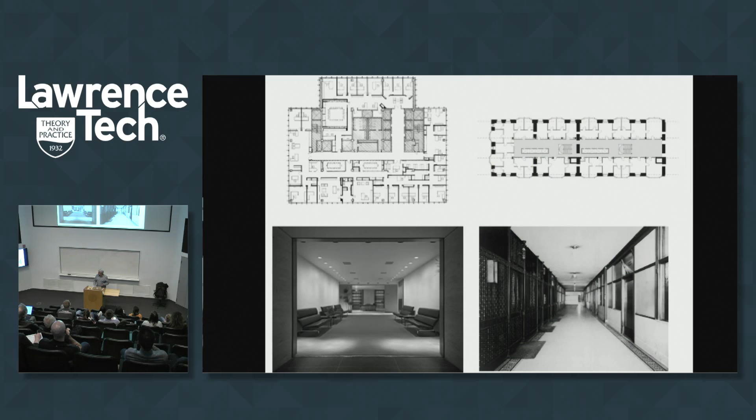Once air conditioning became so widely used, we suddenly just became ignorant as architects. We said, you know what, we've got air conditioning, just do whatever. And this building, the Seagram's Building—beautiful building—but its plan has nothing to do with performance. If you compare those two, just look at the lobby space between them. There's not a single window in the Seagram's Building. There's no natural light; everything is artificial.

So it's like, what do we really want to do? What kind of spaces do we really want?

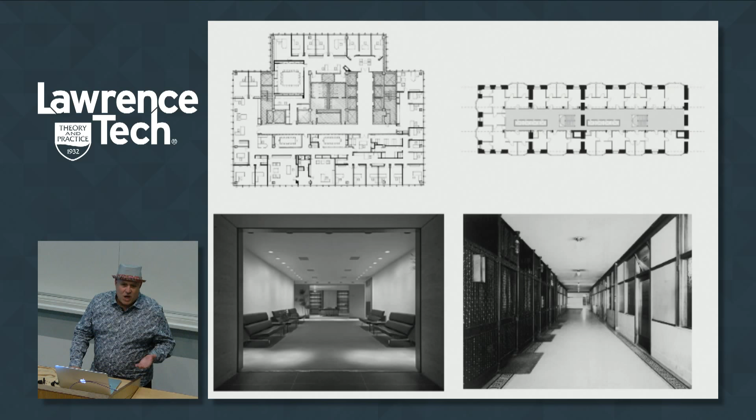So I look around at other things. There are a lot of great examples of buildings that we can learn from, and this is one thing I want to talk to you a little bit about tonight, is about looking.

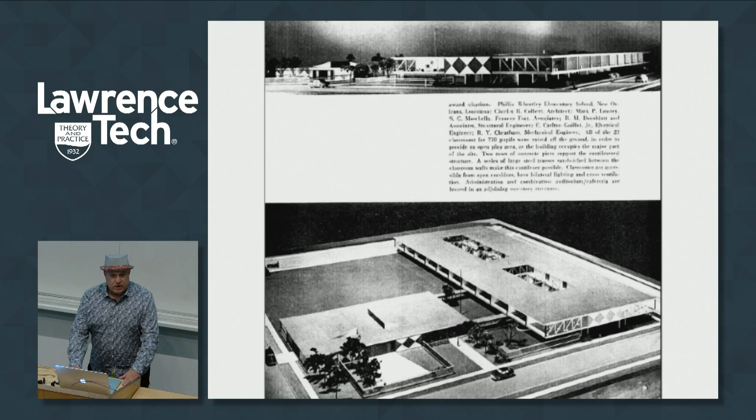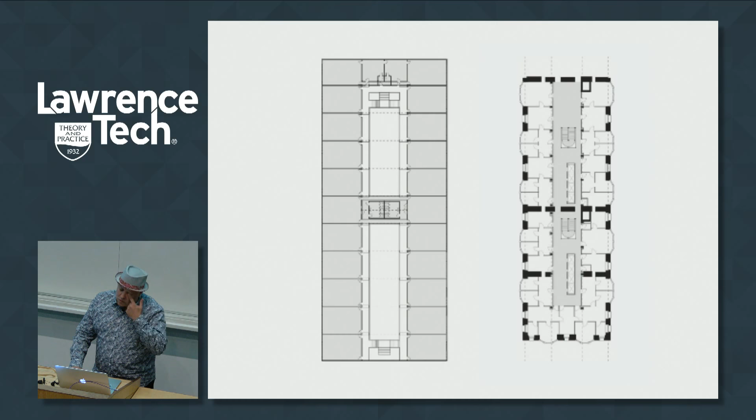This is the Phillis Wheatley Elementary School in New Orleans, done in 1953 by Charles Colbert. And it's a beautiful building, but if you look at the plan, it's almost exactly like the Monadnock. It was that way for a reason, because it was designed without air conditioning. It's this wonderful building with lots of natural light, cross ventilation, and really, really a beautiful building.

This building was around for the longest time until some smart person said, it's a little warm inside here on some days, we should just put air conditioning in and it'll be a lot better. Well, this is what it looks like now. So as soon as the building's not designed to be air conditioned, and as soon as we feel a little bit uncomfortable, we want to throw things away. This building will probably face the wrecking ball here very quickly.

Another building also in New Orleans, done by the same architect about the same time, another school, is a brilliant design, raised up, created a shade porch. If you look again at the plan, those two little lines in there are actually a stair, goes directly up. No circulation in the building at all. Glass cross ventilation both sides.

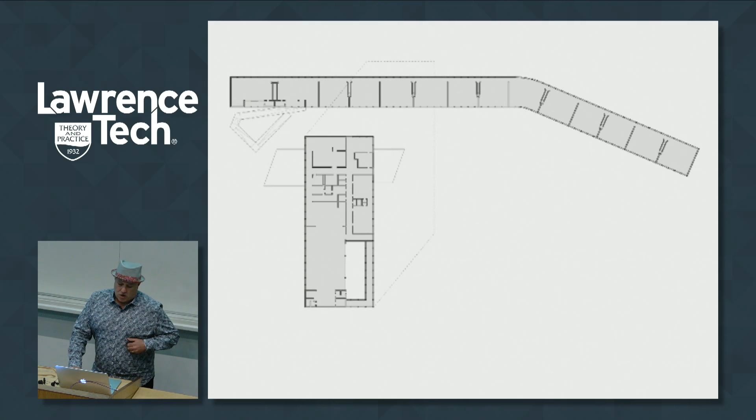It's just pretty magical. So the point is, what I tend to do is when we start a project, I look at other things. I'm showing you some of the research we did before we did a school in LA.

So we did this small charter school. It's a 500 student school in a very tough neighborhood in South LA. This school is built on a site that is 1/15 the size of a typical school of its size, so it's basically an infill lot.

But it has a lot of those things that I just talked to you about. If you see the plan, the long arm faces into the prevailing breezes, so it actually scoops the air between the building and induces airflow through that passageway in the middle. It's also south down below, so the building is shaped to shade the public space outside to the north.

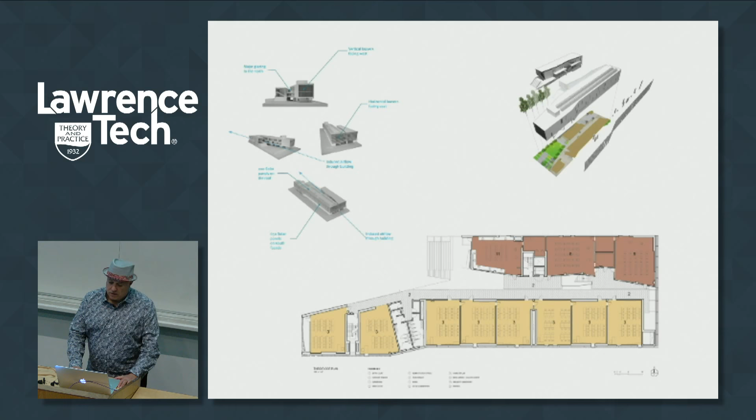So this is kind of a diagram of it. It has 600 solar panels built into the south facade, and you can see the courtyard to the north. My staff actually put the shadow on the wrong side. We can build them, but we don't know how to draw them.

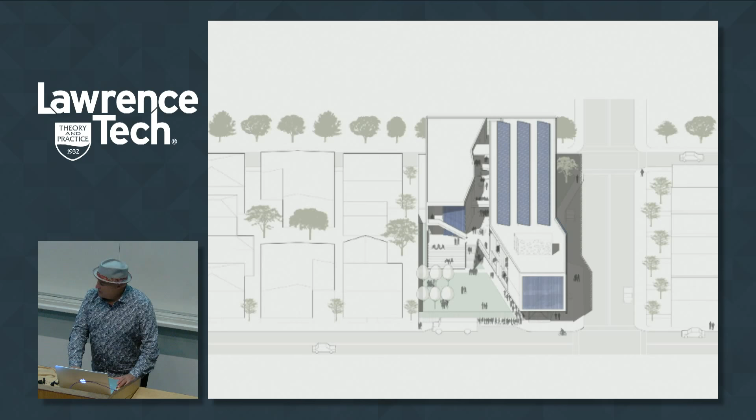And the building, as you look at it, you can see the north side shaded. The west looks like it's solid. This is what the west facade really looks like. It's a very sculptural piece of the building, but it's just 2-inch steel fins, and they're spaced in a way that they provide soft natural light into the building.

And so you get classrooms which have views, they have privacy, they have natural light. They rarely turn the lights on in these classrooms. And this building, because of its low usage of lighting and the solar panels, produces about 80% of its own power.

But I always look at these things too as an architectural opportunity. The idea that it can be both performative and aesthetic has made it almost impossible for our clients to value engineer our projects. So in this case, they said, wow, the solar panels cost a lot of money to put on there. So I said, all right, well, let's take them off and see what happens.

Well, we took them off and reran our energy calcs with no shade on the south facade, and the mechanical system cost went up almost to the cost of the solar panels. So they said, oh, okay, now I get it.

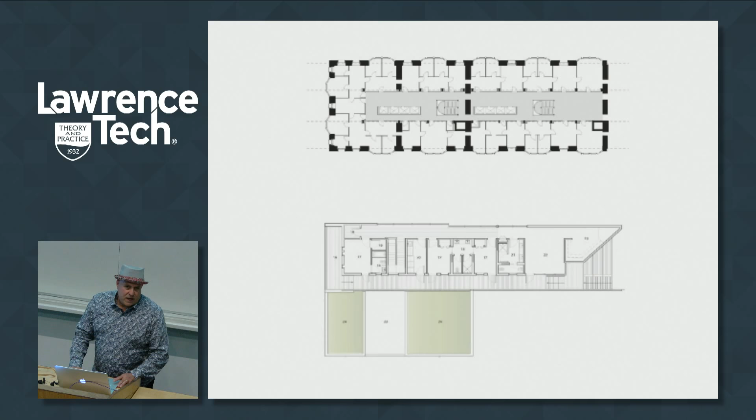On a different scale, this is a house in Venice, California, and it embodies a lot of those same things. The upper roof has solar panels, the lower roof has a green roof. All the rooms have single cross ventilation. You can see the plan here. Every room is just one room deep, and it has either a courtyard or air can pass through both sides. It's very close to the same principles you'd find in the Monadnock building or many other buildings from that period.

This is how you enter, through a courtyard. This is their office space, and again it cross-ventilates through that courtyard. If you're in the office, you can actually see through the living space, so they can be in the office and watch their kids in the backyard. They can even, when they open the doors, yell to them from across the house.

The whole building opens to the garden. You can see the green roof. The bedrooms are small, we basically made them really small so we could put most of the space in the public areas. All of them open out to this walkway. The parents' room is on the very end, so when the kids try to sneak out, they've got to get by the parents. But you can see the solar panels and green roof emerge.

And then these are the bedrooms, again all shaded, small, lots of light. I always say to people, who doesn't like natural light in here? Who hates fresh air? It's just common sense to do it. So we do that on everything, even when our clients don't care about it.

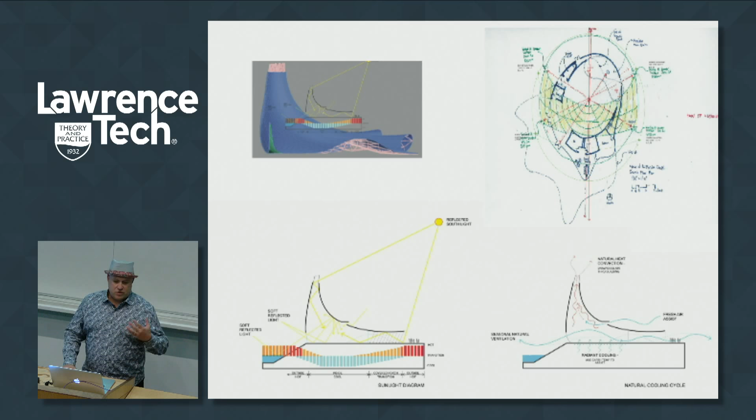As we do this, we tend to look together—it's not just about what you see, it's about being there. These diagrams, the one on the lower left, are about how you approach a building. In Florida it's hot and humid like here in summer, but also really bright. I grew up down there, and I know what it's like to enter a building—every building you walk into, you freeze, your eyes hit the glare. So what we try to do is provide a sequence for how you approach the building: big overhangs that shade you, cool you off before you go in, and let your eyes adjust. Then you go in, and you need less air because you've transitioned into a comfort zone.

The other idea we had was that in North America, the Polaris, or North Star, is always 35 degrees to the north—it doesn't change. So we made this big aperture so that when you're in the chapel, you could frame the North Star.

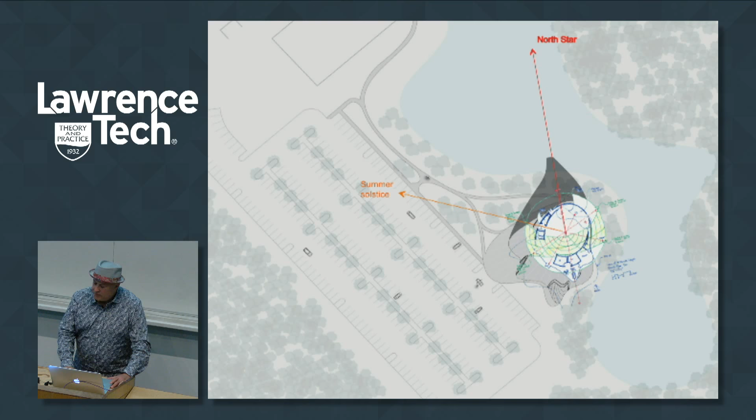It's hard to do a church for everybody—that's for nobody—so we looked for these kinds of spiritual things. We also considered how we placed the building on the site, so that not just the view to the North Star, but also the summer solstice, would align through the building. So one time a year, you could stand outside and see the sun setting right through the building. I couldn't get my mind off this image of the little chapel on the hill.

Also these things which talk about formal dress, whether it's a priest or a wedding—we tried to make a building that was more like a gown, one that could be for anyone.

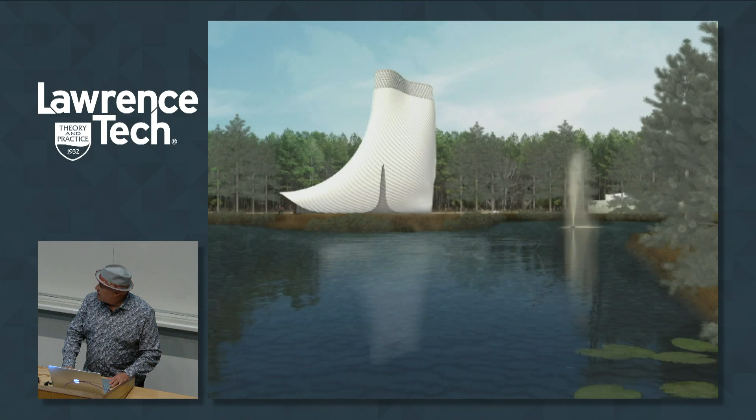So that's our site, and that's our building, and this is how you approach it. The building kind of lifts up, and that's the shaded entry, as you'd see it from the lake. And then the interior with the skylight above.

We also just finished this building in Cedar City, Utah—a $50 million arts complex. They've got these beautiful red mountains there, and if you visit, the sandstone weathering is just spectacular. So I started to think about that sandstone formation.

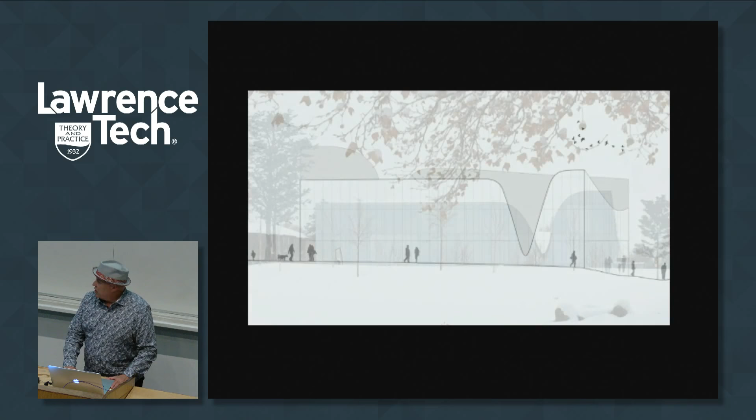That's our site. We started to look at these things and how we might transform a building to be a lot like the slot canyons that exist in the neighborhood—ways to have our building be part of the environment that's there.

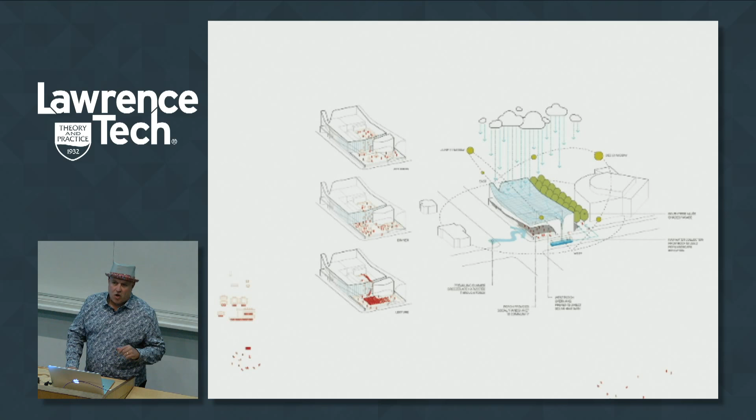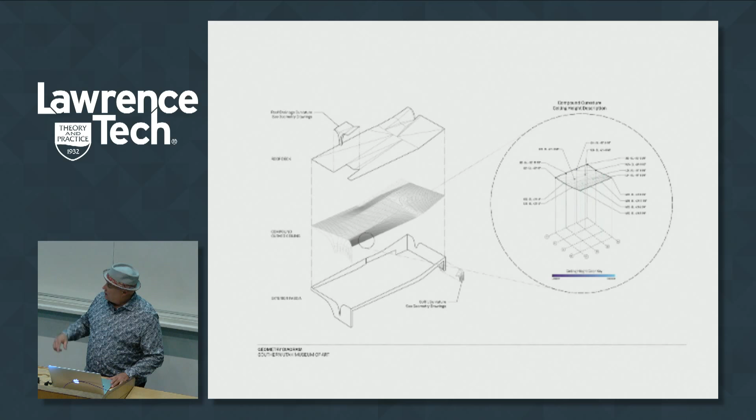This part is the museum—30,000 square feet with a big canyon-like roof that has no roof drains. All the water drains to the two ends of the building and is collected in cisterns. My client was very suspicious about putting no roof drains in the building, but we worked through the geometry to get all the slopes to flow. Part of it is really figuring out how to build it as well.

So here it is on the site, and I'll show you a clip of a bit of the construction so you get the idea. It's got the big porch you're seeing in the front.

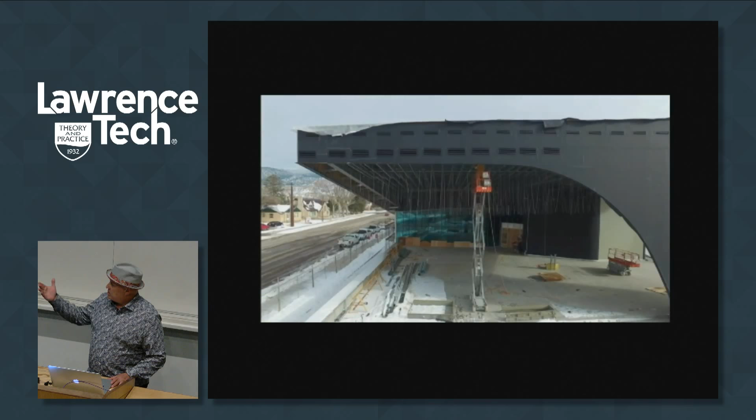One thing I really wanted to do was have the artwork on the inside be visible from the outside. This side faces west, so it's a 110-foot cantilever that allows the gallery to have no shade devices on the windows, so from the street when you pass by, you can actually see the artwork inside the building. Another thing I'll talk about in a minute is how you actually make these forms, or construct them.

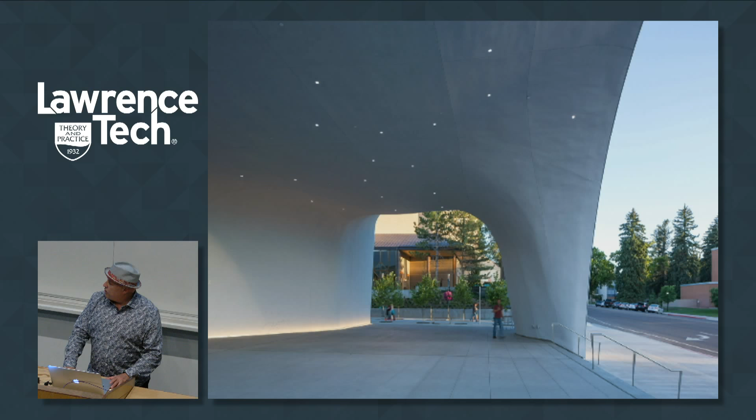So here it is. You can see the big porch, the gallery, and it also has the whole gardens that go with it. They use this porch for outdoor performances and events, and it really connects the campus to the city of Cedar City.

And these are some of the gardens, and you can see the complex of buildings, old and new together. They have about 1 million people a year that visit this place now. It's the Shakespeare Festival.

Another thing we've kind of been looking at is this idea of pattern making, and I don't think we really look at those opportunities enough. I think there's great potential in architecture with pattern making.

I mean, they do it with fashion. They make these custom dresses, and they're able to be repeated or altered in a way over and over again. So I kind of started to think more about how pattern making can be part of making architecture.

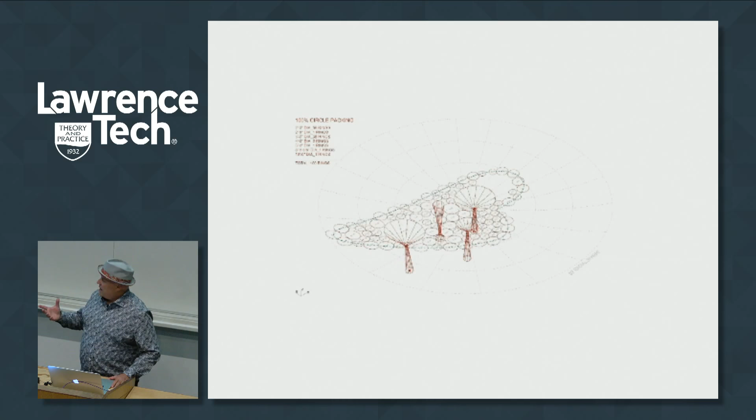So we did a small project down in Florida, and I said, let's try to be like those ladies at Gee's Bend. And so we wrote this kind of script. This is called the Gateway Sculpture. We came up with these components and said, let's just have the components randomize themselves and form. We'll do the pieces and let them make their own pattern.

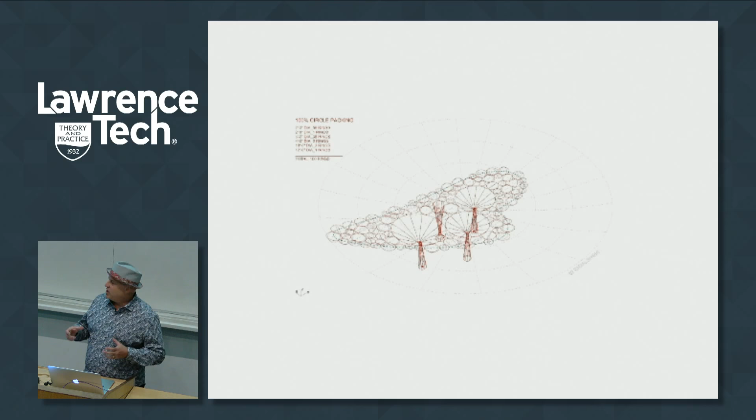So all we would do would move the columns around or change a shape, and then everything would repack itself in place. And so that's what we did, that's what we built. It all then became standardized components.

We broke them down into these standardized pieces and sent it all out. It was fabricated in Denver, Colorado, shipped in pieces, and put in place in like 2 weeks, done very affordably as well. So here you can see them making some of the components, packing them up, arriving on the site, and then there it is in place.

And so I got this job. We were new, we opened a new office there, and they were building a new city hall and wanted a gateway sculpture. I was the only one that said, I'll do it and have it done in 3 months. I guaranteed it would be in place in 3 months. So part of what you'll learn is if you're successful, you create your own work.

So here's some other shots of it.

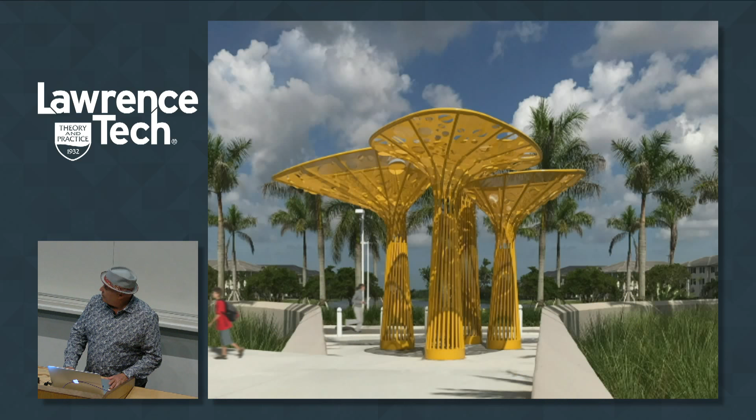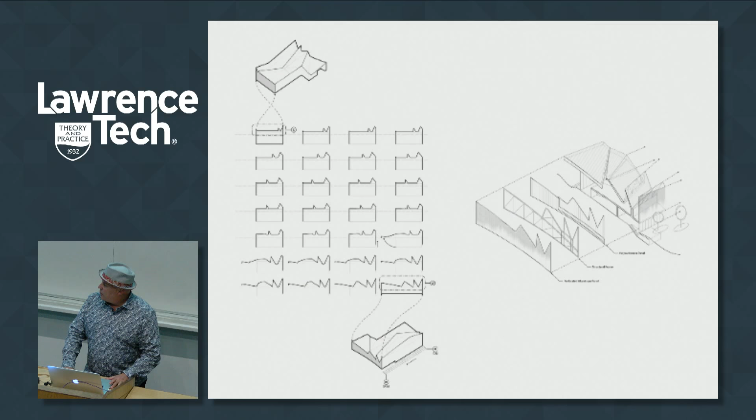So similar with the building, this is an office building we did in Monterrey, Mexico, where it's a very large combination of office and factory. The mountains there are spectacular, and we wanted to do something with lighting or clerestories on the roofs. So we figured out a system of rationalizing the roof geometry and then looking at the panelization of the building, standardizing panels on a form that is really very unique.

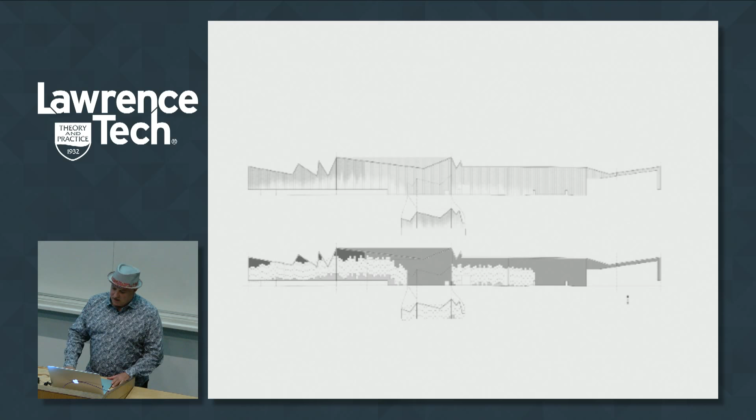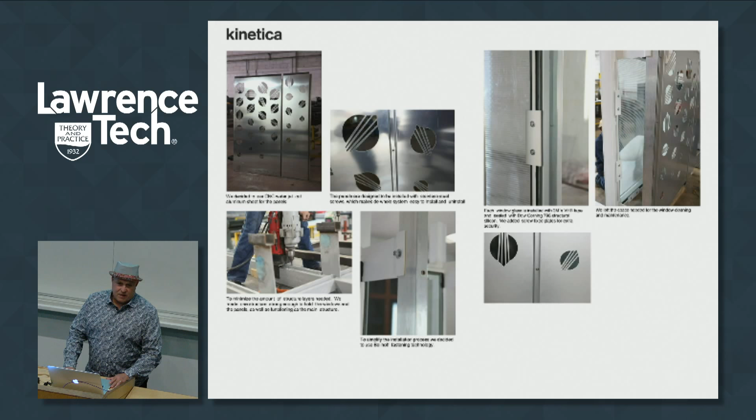We went through that whole exercise and worked with a fabricator in Monterrey, Mexico to develop the system. That's the other thing too, we tend to work closely with people that make the buildings, because oftentimes they know a lot more than we do.

So I've looked more and more at this idea or notion of patterns to try and develop a strategy. The projects I showed you were really more like an artist, where we would do them in a less rigorous, standardized way. So I started to think, can we do it more in a way where we can do one thing?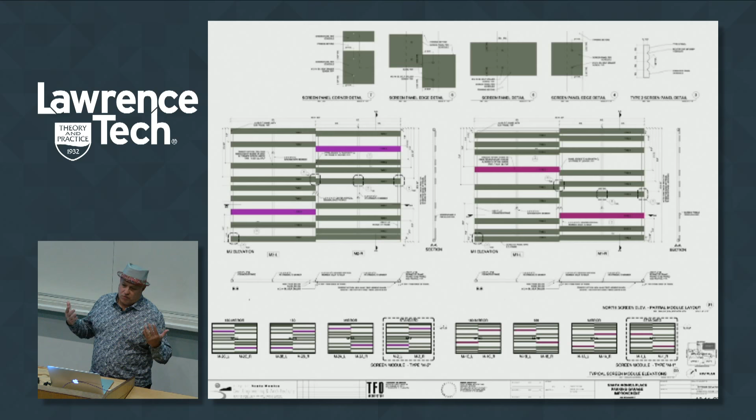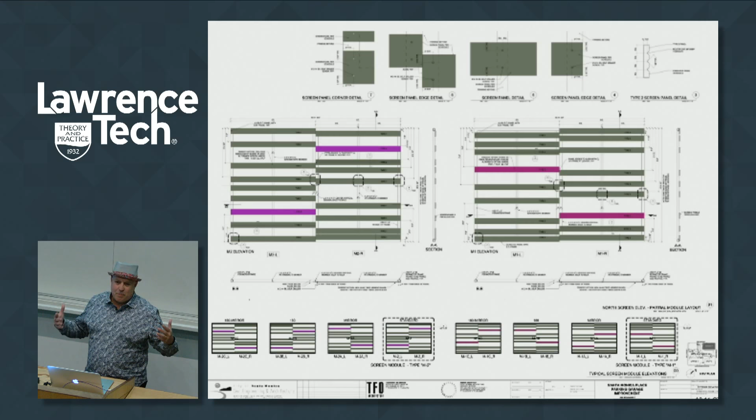So we got commissioned to do a housing project in Santa Monica, and I started to think about this idea of like one single unit - that's it for the whole building.

I found this artist named Patrick Hughes, and he did these paintings he calls Reverspectives. What he does is it looks like the paintings are moving, but it's actually the shape of the canvas, and as the viewer moves by them, it appears the thing is moving. He also uses very famous artwork in the paintings he does. The whole idea of movement is fascinating because it's not the painting that moves, it's you that's moving that's making the painting move.

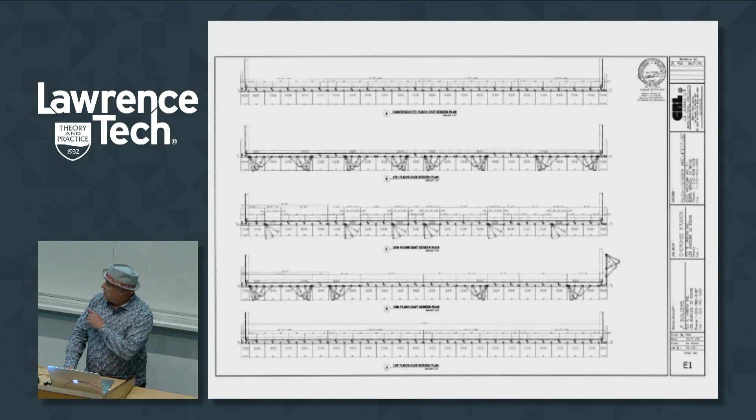So it's really a stucco box. It's got a 4-foot porch, and then the shutters are put outside the porch. So we did all of the drawings, the fabrication drawings for this.

I just wanted to show you some of them. These are actually the drawings they fabricated from, which we created all the details with them. You'll see some other projects where we're doing this now more and more, but down to the very screw.

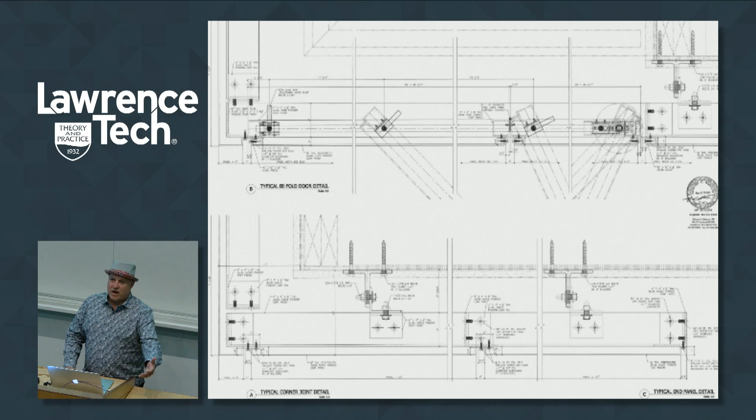And why we do that is because when you have an idea and show it to a contractor, they look at it and go, ooh, that's going to be expensive. So your idea, even though it may not be expensive, they give a price and the client goes, we can't spend that money. But if it's quantifiable like this, they can give you an exact price, and then you know what it's going to cost.

So what happens is there are beautiful views to the east and west, and you want glass because the views are great. But it's on a busy road, and it's east and west, so the sun just pours in, so you want to be able to protect that.

So the shutter gives the occupant the opportunity - if they want to be private, they close it. If they want sun in, they open it. If they don't care that people see them walking around in their underwear, they leave it open. Those that do, close it. So in a sense, the building gets redesigned every day.

So this is really the first one where I think we were able to just take a single module and do an entire building with that single module.

This is now one we're working on right now in downtown Los Angeles. It's the Flower Mart, and we're redoing the Flower Mart, but we're adding 325 units of housing. So now it's like huge scale, and this is where the contractors count every penny. So we have this idea for doing the balconies in a strategy which is really the same amount.

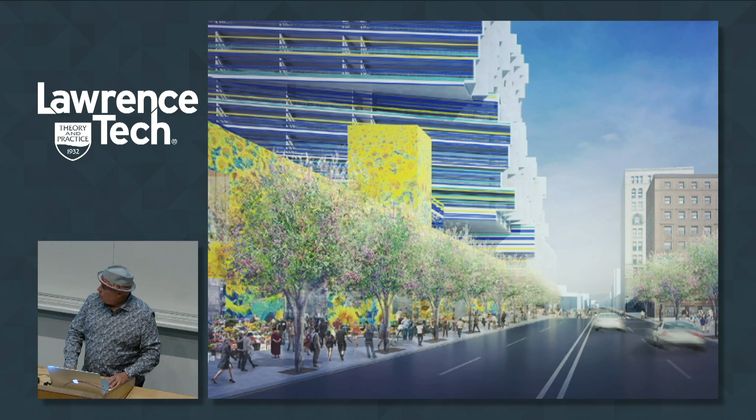So where that's kind of led me to is this idea of mass customization. That's what we call it - how can you do things on a bigger scale? How can you do a design that you want to do and retain that kind of hand craft that Carl talked about, that I did early in my career? I still want to maintain that, but how do you do that on public bid projects? How do you do it without getting sued for malpractice and all those other things?

I can't believe I even did it. Like pickup sticks, they're just sticks, but when you throw them out, it's mesmerizing to see the way they lay out.

So I started to think about the power of a line. And we started to look at this idea of taking lines and applying it to an idea called ruled surface geometry, where you can put a series of lines together and build really complex shapes using just a single line.

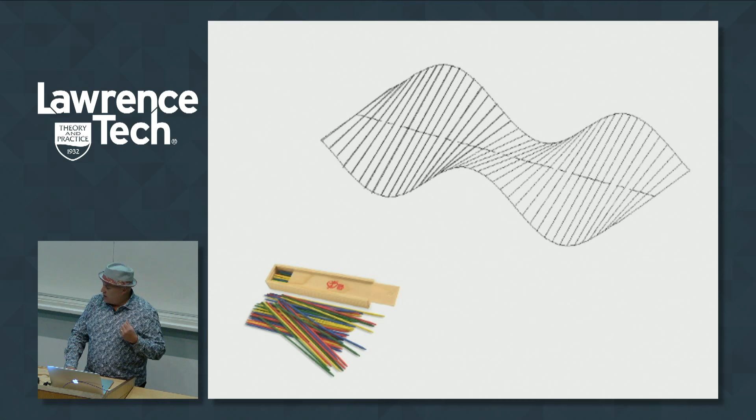So this was a design build competition, and I had teamed with a contractor, guaranteed maximum price with the design. Part of the reason I think why we won was because we were actually delivering a real design at their price. So now the contractor was freaking out because we won.

We have to build it. And he's like, you better know what you're doing. And I didn't know what I was doing. It was just an idea, we were not supposed to win.

But it's a very simple concept. This is the idea: you have a top chord and a bottom chord. And if the top chord and bottom chord are the same length, you can connect them with a straight line. It's super simple. So in theory, that should work magically.

So now we started going crazy. I'm like, man, this is going to be the best thing ever, look at what we can do. So we just started making drawings like this, and we came up with this whole system. This is like what typically would be done, and this is what we're going to do, all right?

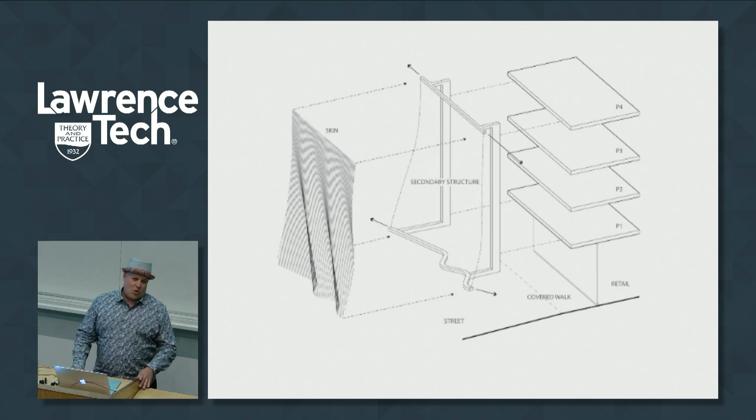And so we started to look at this, and what we failed to take into account is that the building is like 75 feet tall, and you can't span from the top to the bottom with just two chords. You need intermediate chords. And those intermediate chords throw the whole ruled surface geometry out the window. It just doesn't work because you can't rationalize those points in between.

So now we had kind of a new problem. And this building was permitted with foundations, then concrete, so we were basically designing it as we were building it under a guaranteed price delivery. So we were working like crazy to figure out how we're going to do this.

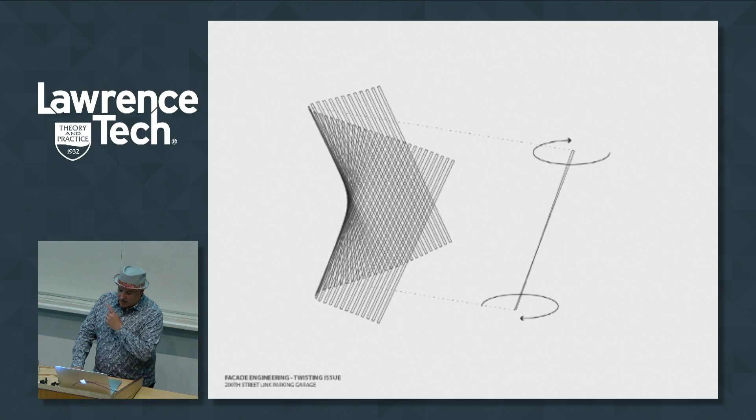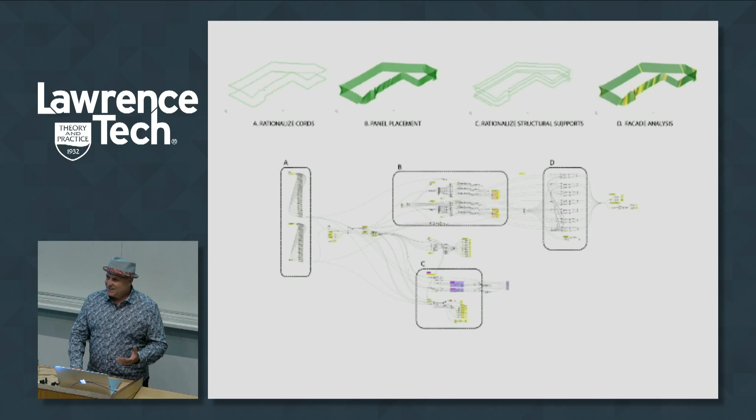So we started to look at a lot of conditions where you get torsion, and twisting became an issue. So we started to look at how we could rationalize the surfaces and the curves by implementing other things. So we wrote our own scripts to do this, and we started testing these. We did have an engineer, but the engineer's like, hey, can you give me your scripts? So we did all this work testing them.

Now, in a perfect world, those blue things that are curving like that, that's really bad. That means every single piece is unique. So if it were perfect, it would be like a flat line, and that means every piece would be the same. But there were so many things that we had to look at.

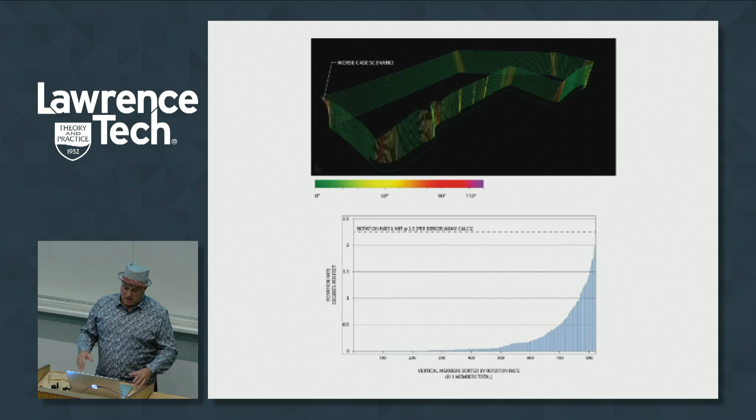So like, what's the optimal span of the horizontal supports? What's the optimal thickness of the material, the shape of the material? So it was a giant, complicated puzzle that was changing every day as we would build it.

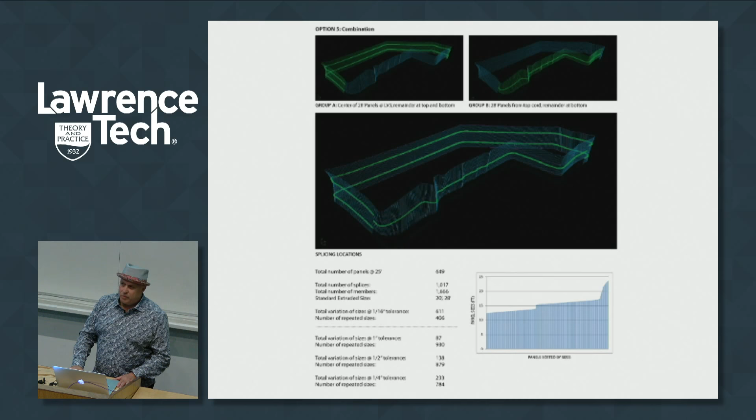So I'm just showing you some of our analysis, and this is close to the very end, and you can see that graph is getting almost flat, and we got it down to only a handful. There were 8,500 pieces, and only a handful of them were unique in the end.

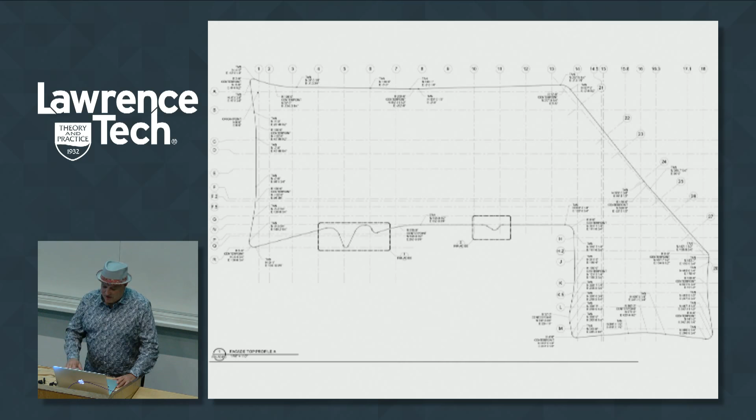So then we would look at our model. We would take all these beautiful rendered curves and go, uh-oh. So we would go piece by piece around the building, take these areas, and then rationalize those curves. So all of the curving components were broken down into only 2 or 3 radius on the entire project.

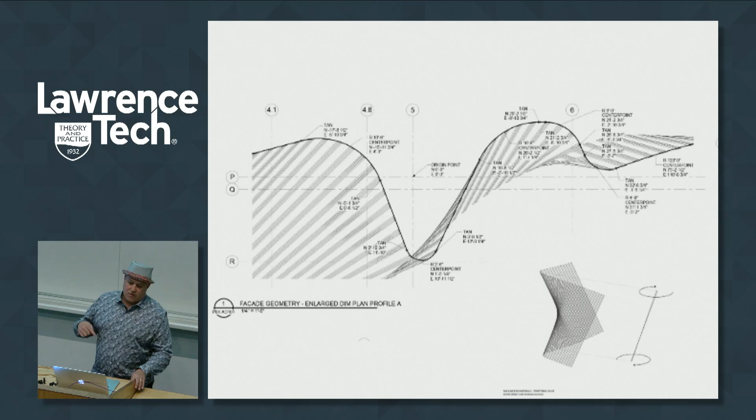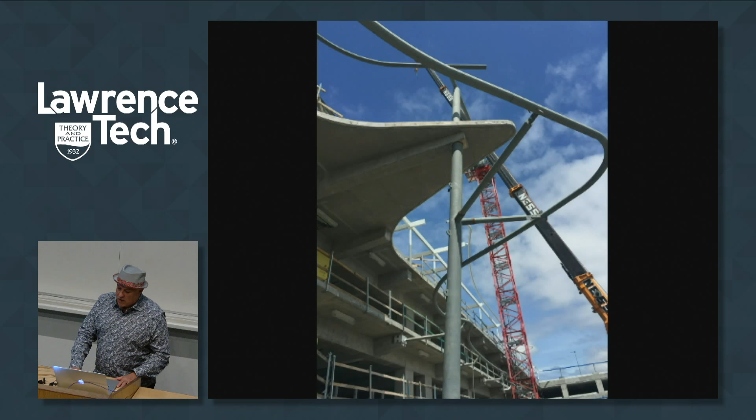And so we provided all the fabrication drawings for this project, so they went from our desk directly to the sub to bend them. This is how it would come out on the site from our drawings, that's how it would go up, and they just went away with the horizontal supports.

There were too many complexities to make that work. So I found this thing called penboard, which had properties much closer to what we needed, but ultimately it didn't work. So we started to design our own extrusion.

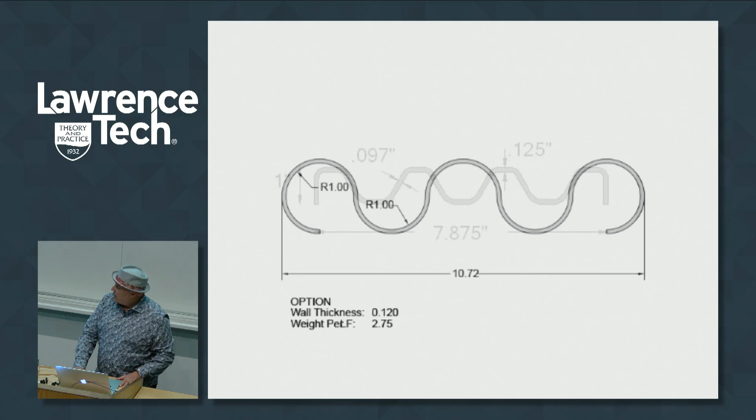We started to look at a similar shape that conceptually matched what I wanted in the design competition, but would meet all the paradigms of torsion, its ability to span, and was the most efficient weight. So what I'm showing you is how this shape transformed as we modified it.

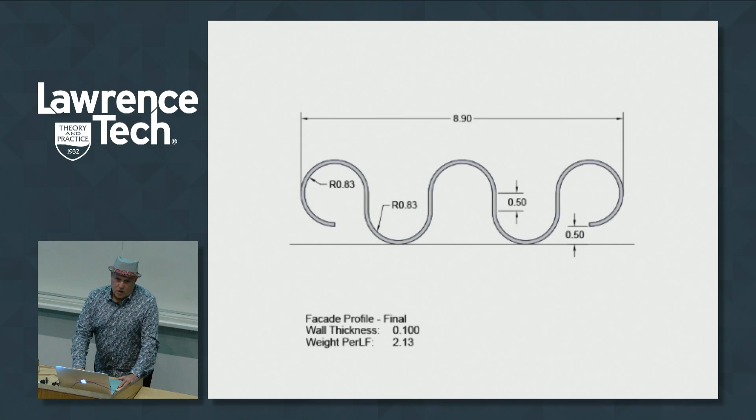And that was our final shape. We invested about $28,000 for a mold, and we produced miles of this stuff.

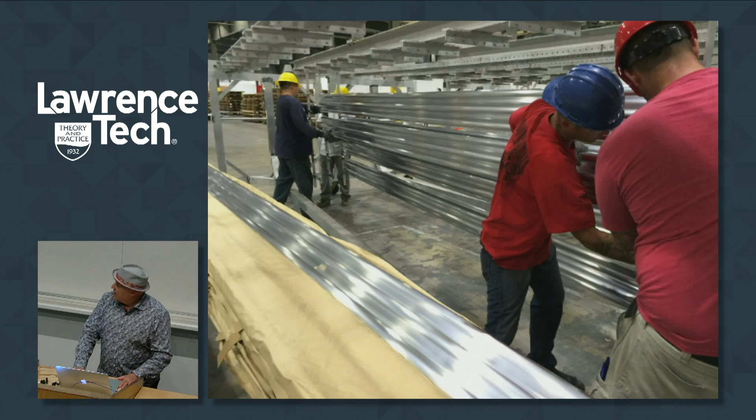Here it is, here they are testing it to make sure the properties actually turn out as planned. And then there's our happy contractor with the 8,000 plus pieces packaged up and ready to go. So it was a sigh of relief for him.

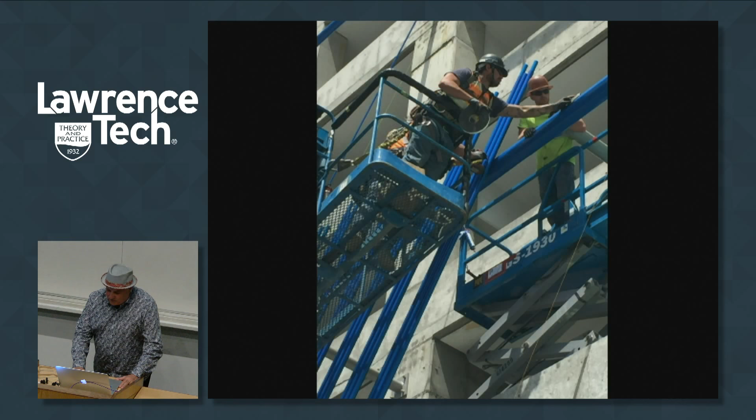And then they put it in place. All the horizontal supports had a little weld that was computer-placed for where they're to screw it. And you had four guys and two cherry pickers, and they put the whole facade up in a week.

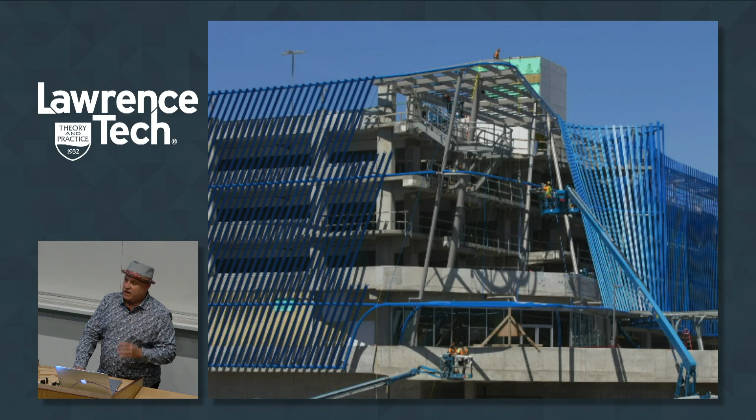And the building too, all of these actually change. They're not in the same orientation, so they lean and straighten around the whole building. So they're not vertical, but they're also not the same shape, though they're basically 8,000 of the same exact form.

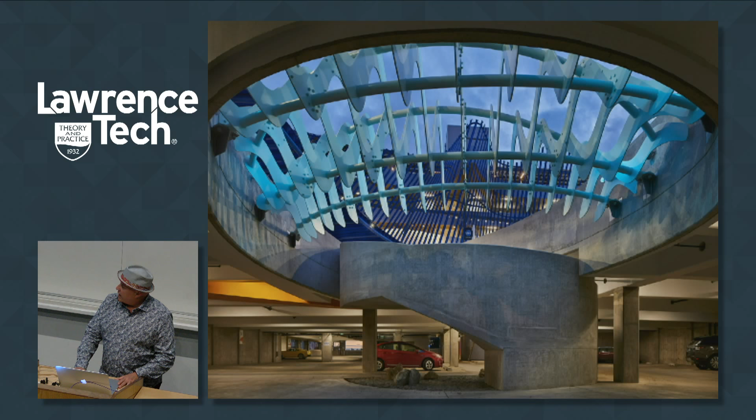So we also look at this — I call it a little bit of calculated risk-taking. We don't throw caution to the wind and do whatever, but we have what we think we can make work, and we kind of test it and go with it. I think it produces a lot better results than if you know exactly what you're going to do.

And so we got a commission to do a house in Chicago. I was like, that's great, I can do it, I can do this out of brick. And my client wanted a metal house. It took me a long time to convince him to do brick.

Oops, that's my son, sorry. Yeah baby, yeah baby, sorry about that. Call him later.

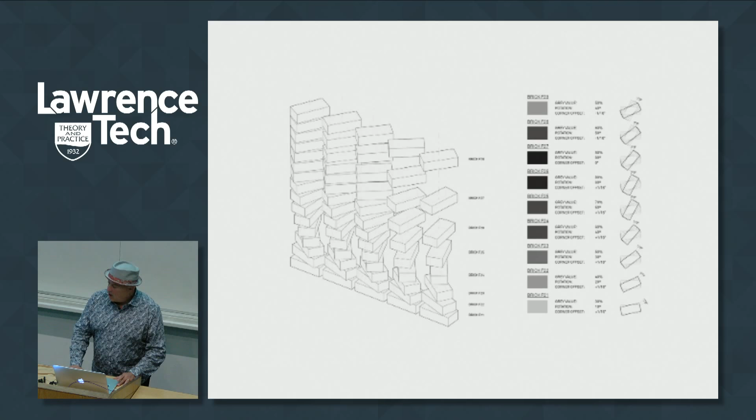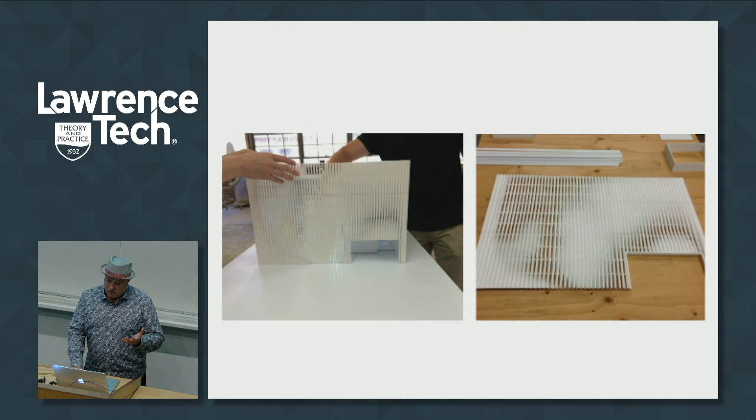A lot of these studies are about that. So you can see the drawings — this again is a drawing of every single brick of the facade. And then we test it with modeling. So here's a piece of a model. And you can't just have a picture, because a static picture doesn't show it.

So we would make these little films. If you see here, the facade goes from solid to void. It changes as the user moves by it — it's actually changing from solid to void.

The owner's actually moving into this house in about a week, but he's been spending a lot of time there lately. He says now people come by and stop their car in front of the house, then back up, then pull forward, then back up again, trying to look through the brick, but it keeps changing on them. So I thought that was great.

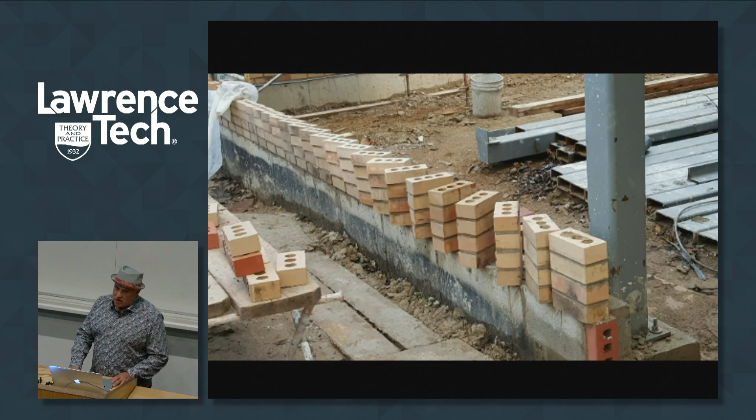So here it is in construction. The same thing happened when the mason looked at this - he goes, oh my God, how am I gonna do it? That's when he saw like a model. But then we showed him an actual diagram of how to do it, and he's like, oh, that's really simple. And he got super excited about doing it.

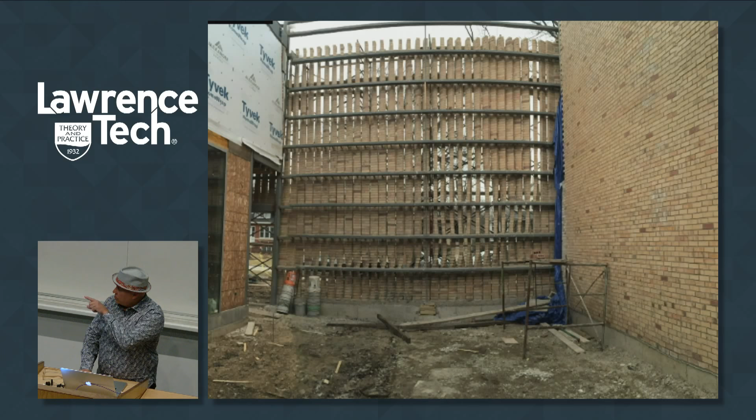So here it is in construction. These are just 1x tubes horizontally - there's no vertical support to it, they just help in the lateral direction. So here you can see it.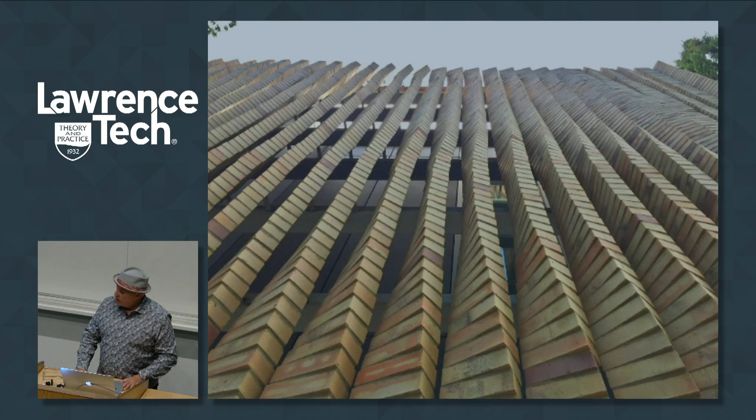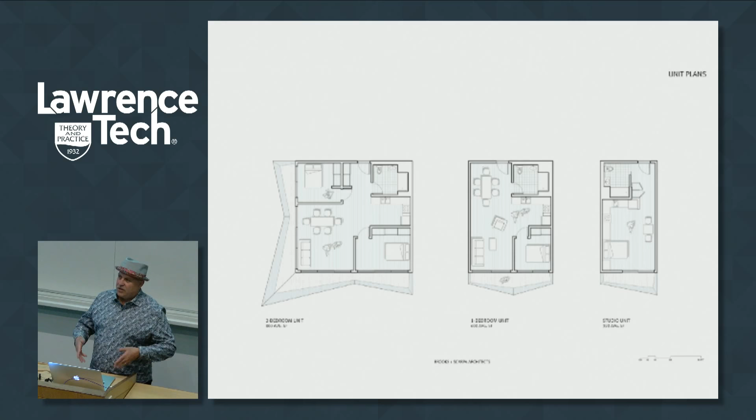We have another building - this is a 26-story high-rise building, again trying to adopt that same idea. This is typical in housing - the plans of a unit, we learned, is make them all the same and stack them, and you get a whole lot of efficiency. What you could have a lot of latitude with is the perimeter of the building, so like the balconies. You see these odd shapes on the balconies, but we just took a typical concrete slab building.

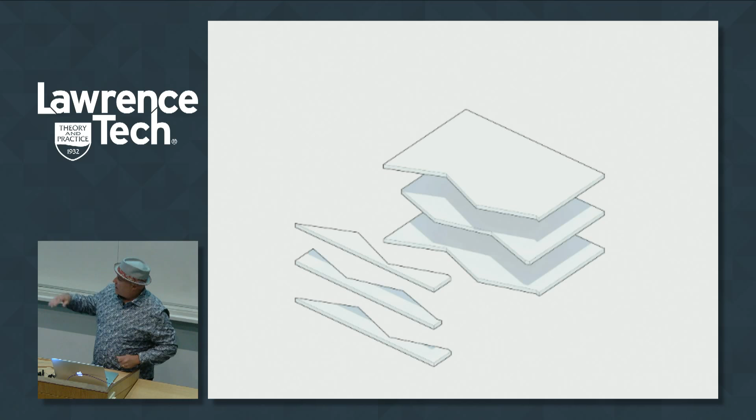We basically formed them differently. There's a repeating pattern of forming on each floor so that formwork can be reused around the perimeters, and those are shaped to then connect vertically to form the balcony. So you get this really dynamic building, which is nothing more than just tilted edges of concrete.

So it's our costs - again, our owner was very fearful when looking at the cost of this, and then when the costs came in, they were shocked that it's not more expensive than it is.

The last thing I'm going to show you is a project we're doing in Florida. About 2.5 years ago, we opened an office in Florida, and we've been working on what I think are some really important issues happening not just there, but around coastal areas around the country.

This is Fort Lauderdale, and this is not after a rain - this is what's referred to as sunny day flooding. What's happening in coastal areas of Florida now, and in Fort Lauderdale it's really bad, is that storm drains are actually delivering water to the downtown, and it's flooding when the tide rises. So on a perfect, beautiful, sunny day, this is what's happening - the streets are flooding.

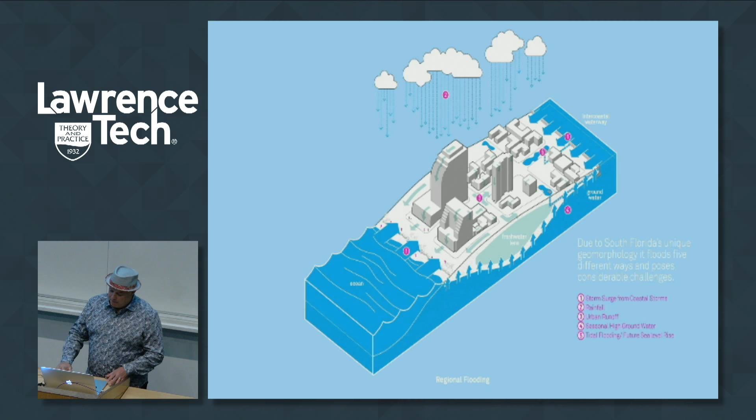So we've done this modeling throughout the city showing what different stages of conditions would happen at so many feet. We've been working with the city to establish what rise do we want to design to, and we're basically now looking at the city as if they're going to have 3 feet of sea level rise.

So we've done this kind of mapping around the city. Fort Lauderdale's really bad. Everyone thinks Miami is the worst spot, but Miami's actually on a little high piece of ground. Florida's like a sponge that's leaning to the south. If you look at the historic maps, the water comes right through Fort Lauderdale to the east and to Naples to the west, and Miami's like a little hump that's pretty dry.

So this is the Fort Lauderdale area with 3 feet of sea level rise, what it would look like if they got 3 feet. It's pretty much all underwater.

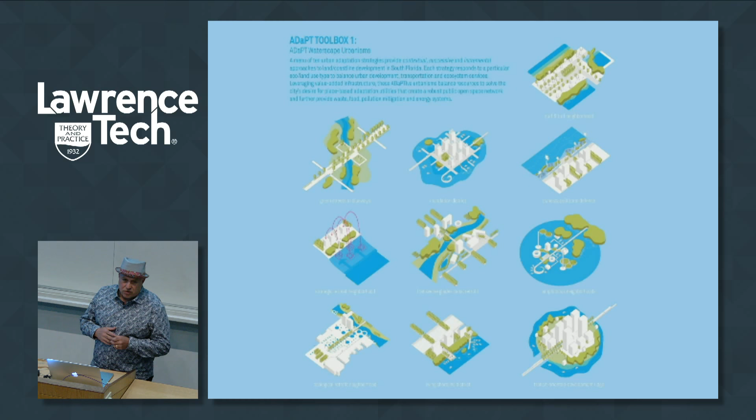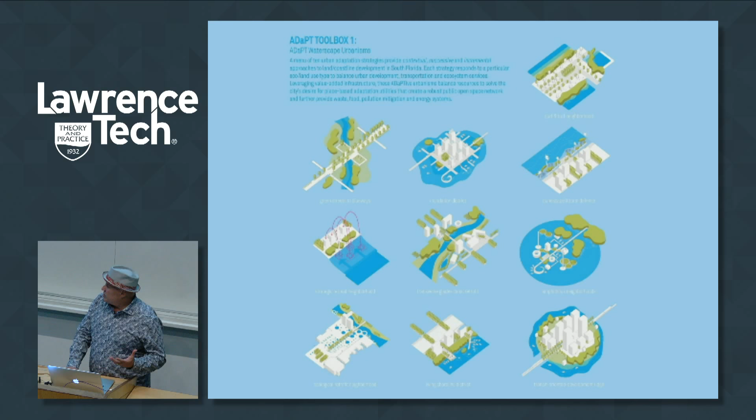So we've developed these kind of toolkits to deal with it, and they're kind of incremental. We have 3 adaptation toolkits. We call them adaptation strategies because there's sort of no turning back, so you just have to adapt to it. The first one is this really simple strategy where you're dealing with conditions by localizing the flooding.

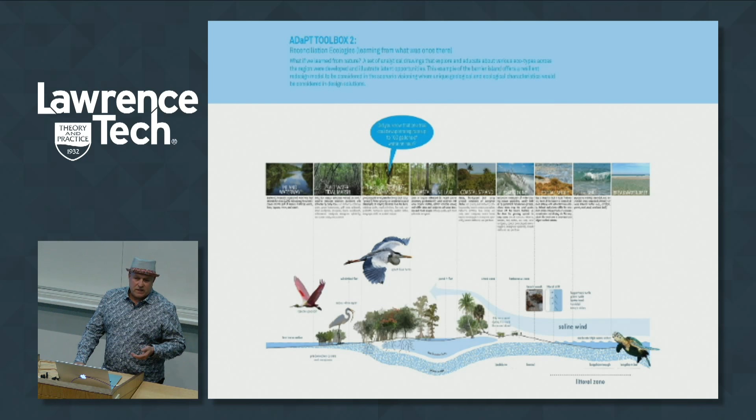And then there are other ways, like reintroduction of landscapes that help with this whole issue. Kinds of plants that can take the salinity of the water, and also other plants that have high levels of evapotranspiration, like oak tree. Scrub oak in Florida can evapotranspirate - one tree, like 600 gallons per hour. So it's pretty amazing what you can do.

So these are just some of the toolkits which we're developing, and the end product is going to be a book that the city will use to show other private developers and people here's what they should be doing with their buildings when they develop.

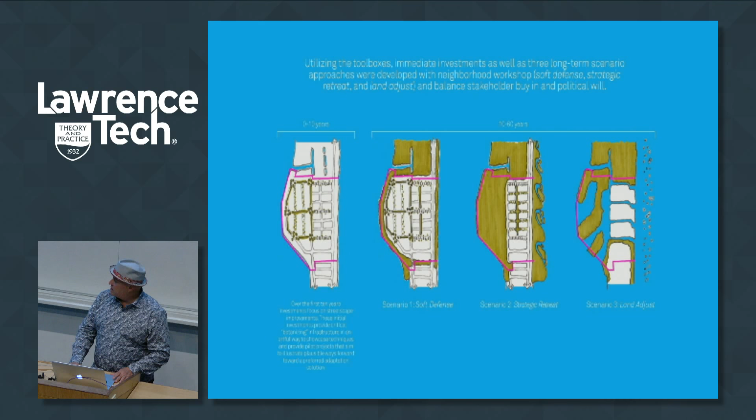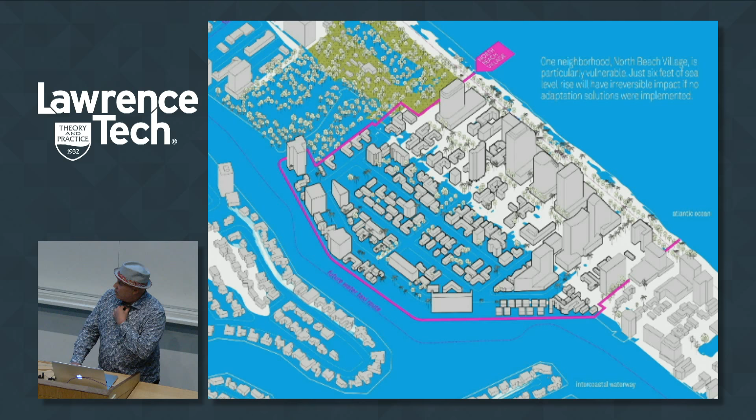So these are the kind of stages from stage 1, 2, 3, and 4: you fortify, then you retreat, and then you abandon and rebuild. We've done these mappings all over the city, looking at areas of how to deal with it and what it might look like. We won a national AIA award with this project this year.

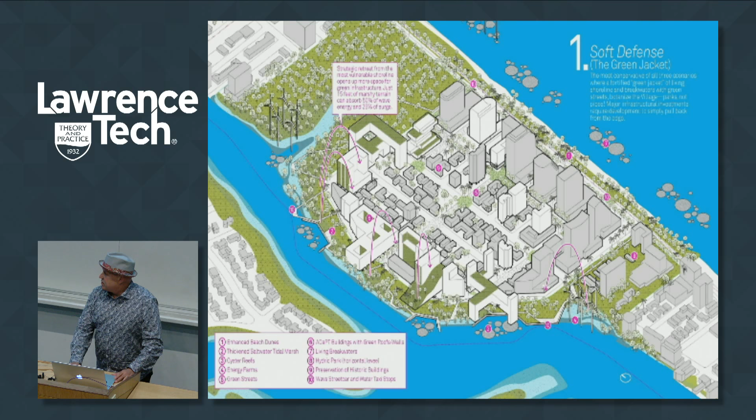So here's the defensive strategy, the first thing that you would do - this is over the next 20 years. And then the following 30 years is to begin a strategic retreat in certain areas and let the water kind of come up.

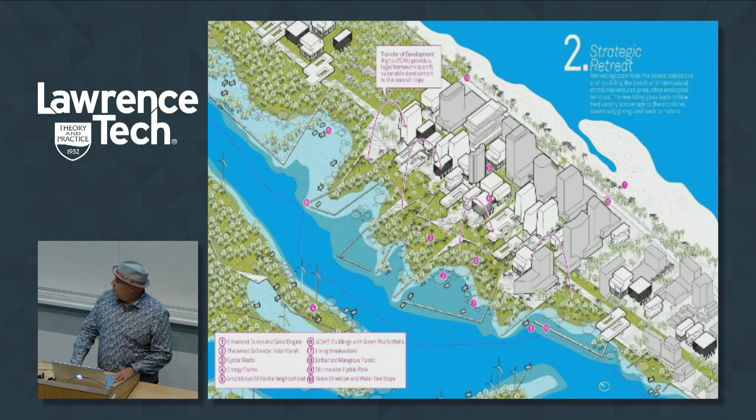And then these are adjusting as the water rises. So the buildings - everyone thinks buildings are permanent, but they're really tied to a mortgage cycle. Pretty much there are very few buildings that last more than 30 years. They tear them down or alter them.

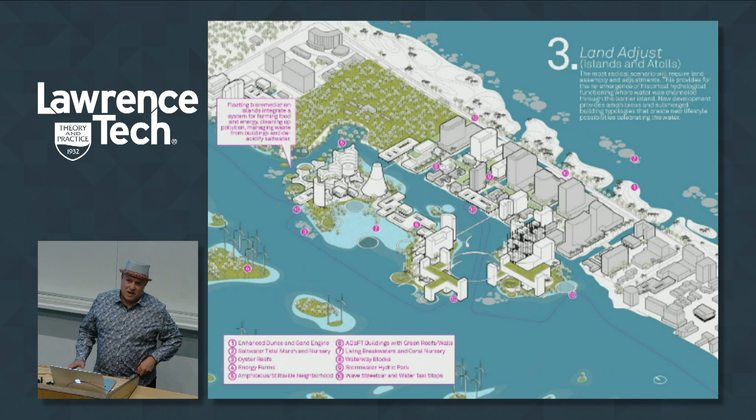So it seems like a catastrophic thing, but if you even look at Detroit and the history of what's happened there over time, buildings come and go, so it's not as dramatic as one would think.

These again are some of our toolbox strategies that we're developing.

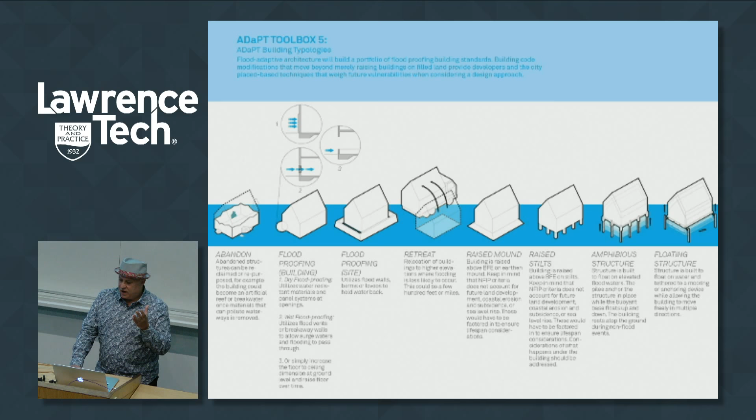So you remember the hurricanes last year that hit South Florida? We were in the middle of working on this, and the city of Fort Lauderdale had just spent $4 million doing a beach re-nourishment program, because they're losing sand - they can't even get the sand out of the ocean anymore. So they go to Central Florida and truck it over and put it on the beach to make their beaches bigger. They just spent those millions of dollars, right?

So it's coming, we just have to do things about this. It's something that's going to be with us - it's going to be your generation. The good news is there's going to be lots of work for you. The bad news is you need to do something about it, okay? So I'm putting that seed in your head.